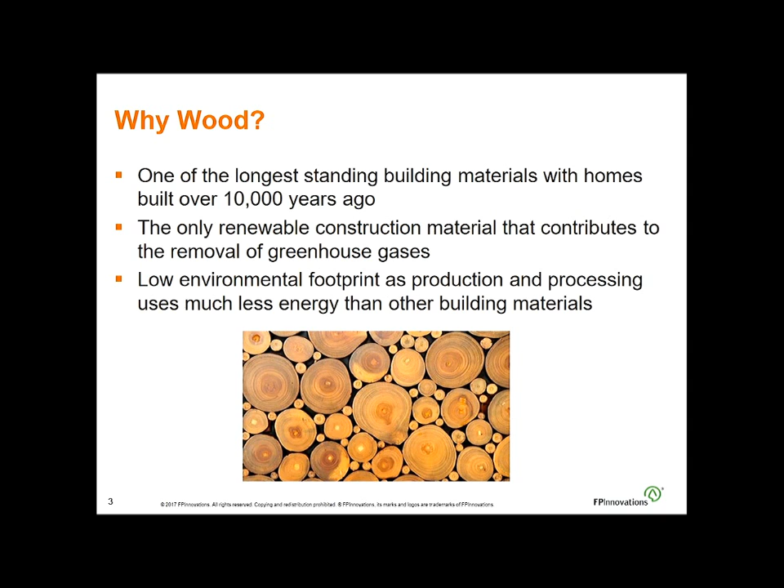So first of all, why do we use wood in buildings? Wood is one of the longest standing building materials, with homes built over 10,000 years ago. It is the only renewable construction material that really contributes to the removal of greenhouse gases, and it has a low environmental footprint because it requires less energy to be processed and produced, much less than other building materials such as steel or concrete.

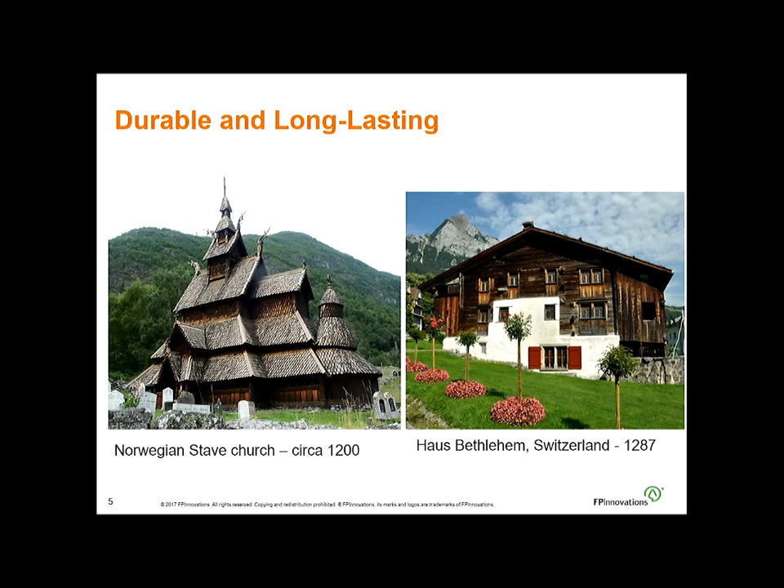Wood can be durable and long-lasting. Examples of that are everywhere. On the left, you can see Norwegian stave churches, which have been around for more than 800 years, or the Haus Bethlehem in Switzerland, which is probably the same age. These are among the oldest wood buildings in Europe, and they've withstood the weather and everything thrown at them. So the problem is that wood can be durable, but the problem we have today is that designs are not adequate to make the wood stay as it is and be durable.

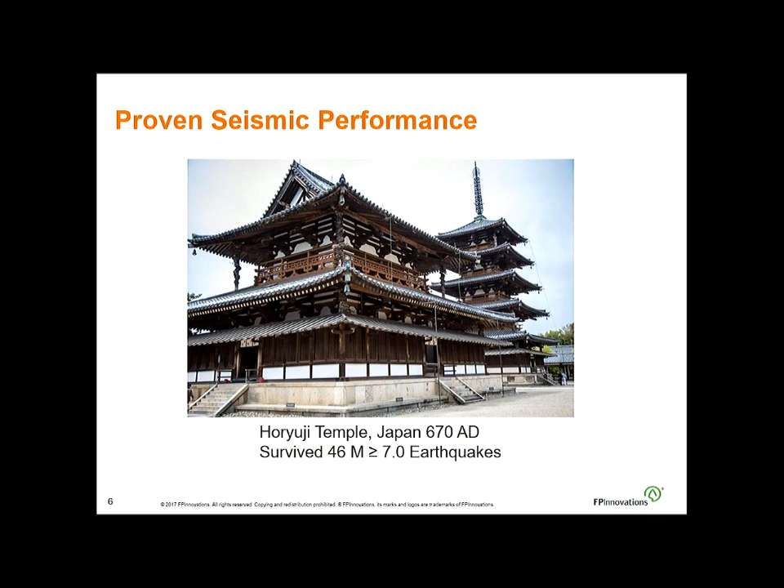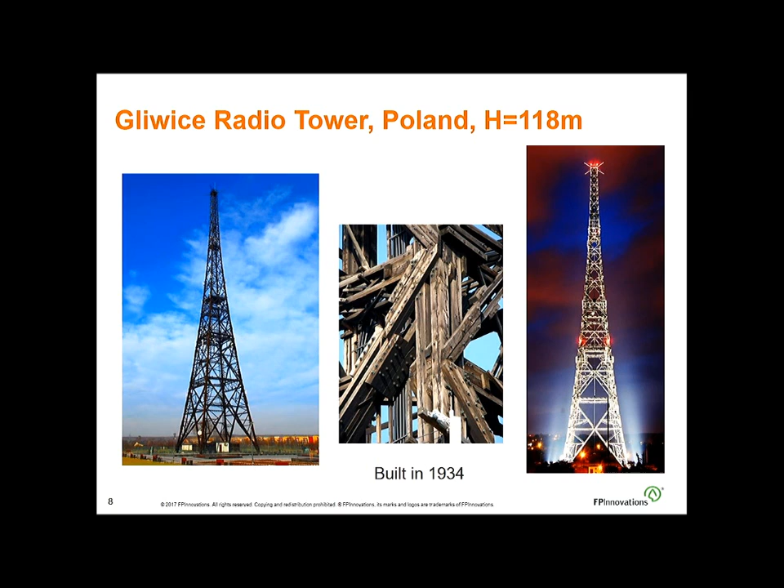But as I'll show later, the times came when we basically went quite in the other direction.

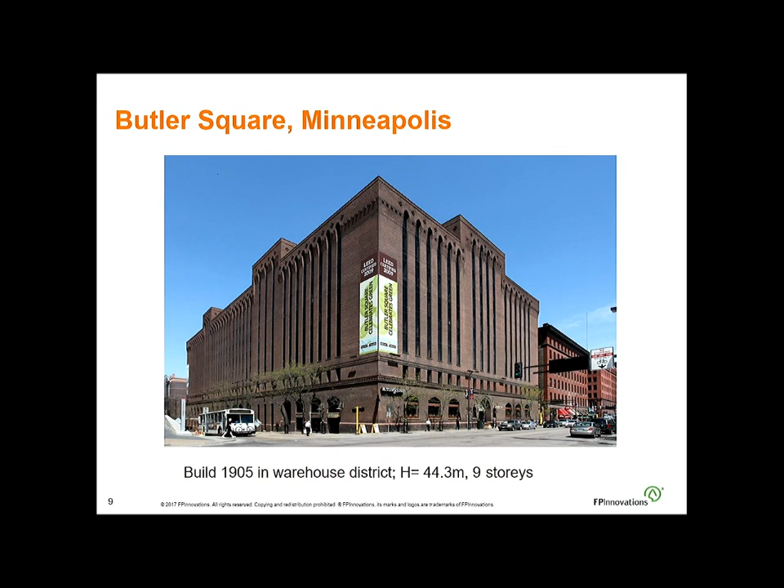Wood buildings can be also large. This is a wood building, one block in one dimension, almost two blocks in the longitudinal direction. It's a bit ugly on the outside, and you'll say, oh, this is not a wood building, but actually it is, 44 meters high, 9 stories. It's the Butler Square building in Minneapolis. But when you go inside, you see the real beauty, a beautiful open space, heavy timber building with a combination of offices, restaurants, and gathering spaces. It's a beautiful space to be in, really enjoyed by a number of professionals who have their offices there.

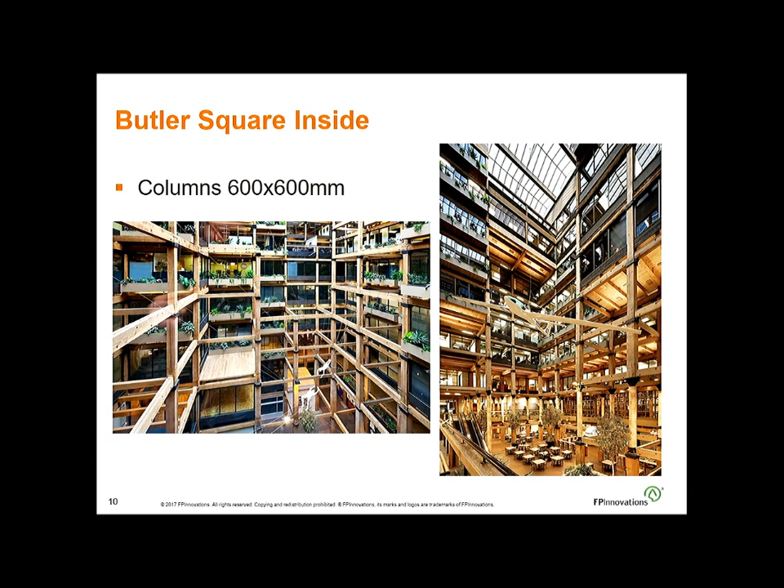And just to show you that buildings like this, as big, have been built 100 years ago.

Speaking about tall buildings, which will be one of the main topics of my talk, wood was not doing that bad in history. For example, in the US, at the turn of the 20th century, we had that 9-story timber building in Minneapolis, 44 meters high. The biggest concrete skyscraper was the one in Cincinnati, with 64 meters. And the Chicago Home Insurance building, a 12-story steel building, with a height of 42 meters. So wood was not doing that bad at the time. Actually, we were right there somewhere.

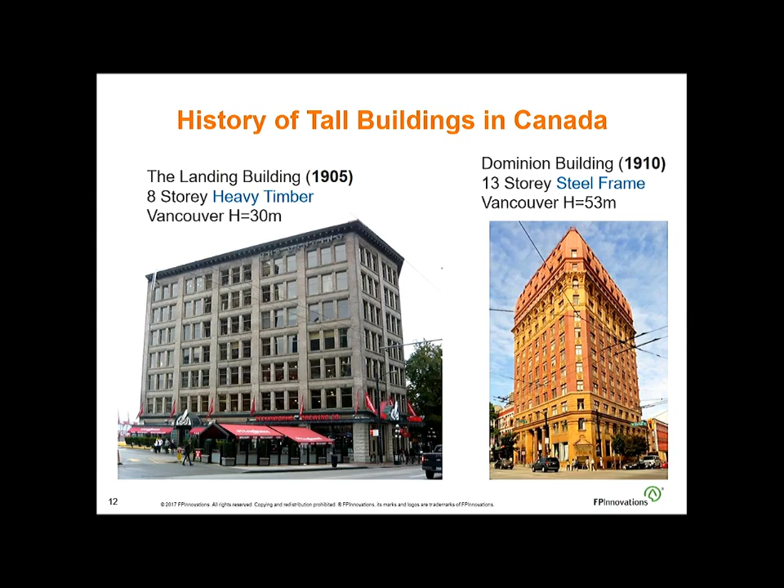Well, then the Dark Ages came, at least Dark Ages for wood. This rich history of wood use in tall buildings was halted during the second decade of the 20th century, and there were many reasons for that: fire performance concerns, frequent fires in major cities, although many people say now they were suspicious — of course, we have no evidence; wide availability of structural steel as a material; rapid development of reinforced concrete technology at the turn of the century; and last, the rise of architectural modernism that didn't include wood. So we blame the architects a little bit for this.

So because of all of this, suddenly from having timber buildings 40 and 50 meters high, we went down in just a number of years, restricted to low-rise construction up to 4 stories, and this lasted for almost a century, almost until the early 1990s.

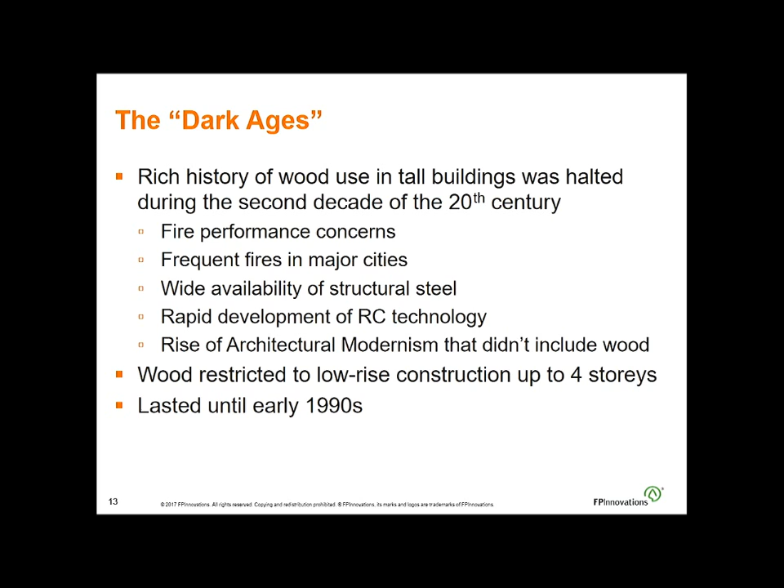Then in the mid to late 1990s, there's a renewed interest in wood, for several reasons. First, changes in the building codes — as most of you are engineers here, you probably know the codes changed from prescriptive design to objective-based design, which helped wood a lot. Then we had government support and legislation to promote wood use in buildings. Of course, there was development of mass timber products such as parallel strand lumber, laminated strand lumber, cross-laminated timber, and so forth; innovative manufacturing technologies such as CNC numerically controlled machines, and development of innovative connections. Finally, society came to a stage where there was a search for greener construction materials.

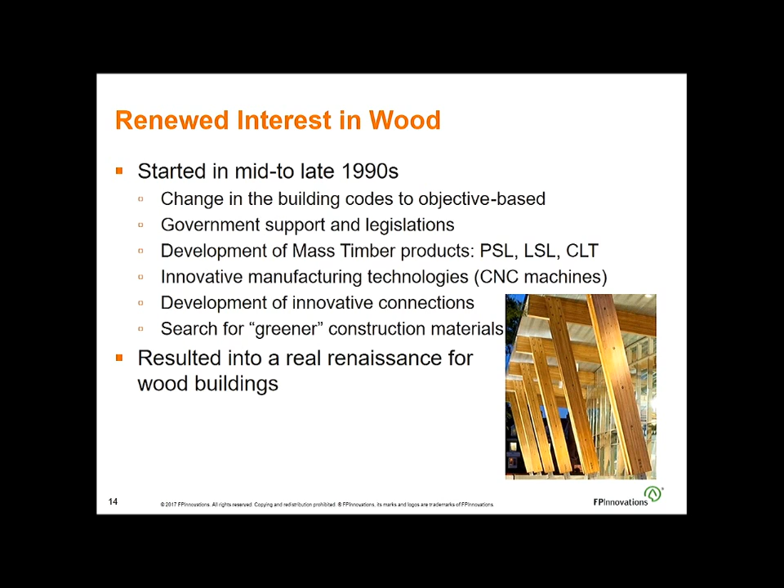So all of this together — like 100 years ago there were lots of reasons that went against wood — all of these reasons now suddenly went for wood. And that resulted in a real renaissance of wood building use that we are seeing today.

Cross-laminated timber was one of the main items that really got the spotlight back on mass timber buildings. For your information, in Canada there are 3 manufacturers: one in BC, one in Quebec, and one in Ontario. There's strong interest among designers and architects, strong support from federal and provincial governments, especially in British Columbia and Quebec, and considerable research and development activities going on to implement not just cross-laminated timber but also other products in buildings.

Then another buzzword came in 2011: tall wood. This was a report produced by Michael Green Architects and Equilibrium Consulting, an architectural and engineering firm from Vancouver. In 2011, they produced a report studying a system called FFTT, or Finding Forest Through the Trees, which is an unusual name. But what they proved as a concept is that wood can work in 20-story buildings, 30-story buildings, or even 40-story buildings.

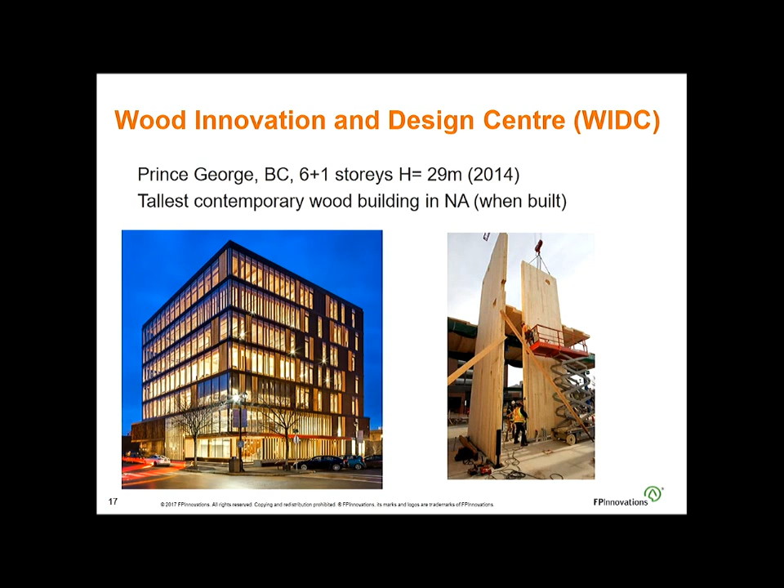So that's 2011, and since then we've seen a real explosion of what we call tall wood buildings — not tall in terms of steel and concrete, but tall in terms of wood, meaning 10, 12-ish stories and in that range. The first tall building in Canada was the Wood Innovation and Design Centre in Prince George in central British Columbia, a 29-meter building built in 2014. When built, it was the tallest contemporary wood building in North America, and from a structural perspective, it was the first building to use CLT in balloon-type construction.

Because cross-laminated timber was first produced and used in Europe, it was always used as a platform type of construction. So basically you have your wall, then you have your floor, and then the next wall and the next floor, and so forth. You develop a platform on which you build the next story.

This is the first building in Canada that used balloon technology for the walls, which means the walls go all the way from the bottom to the top of the building. The lateral system was taken by these elevator shafts and stairwells, balloon type walls, while the gravity system is all around by using glulam columns and beams.

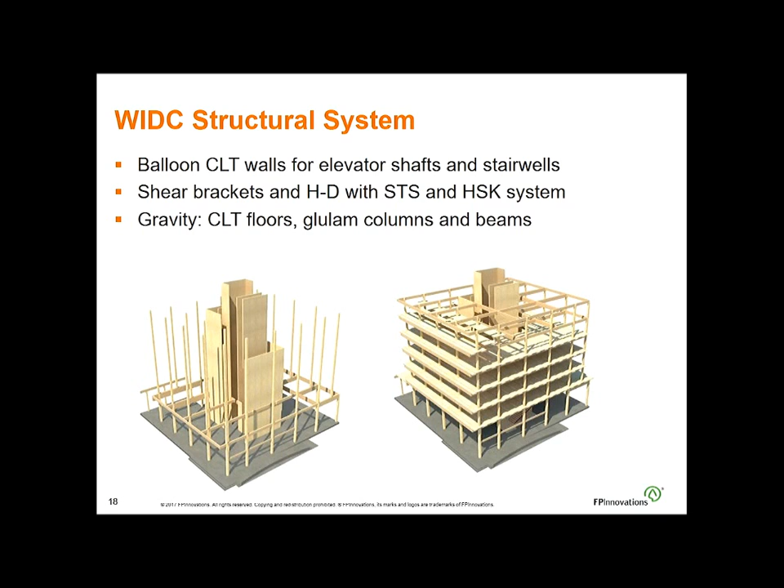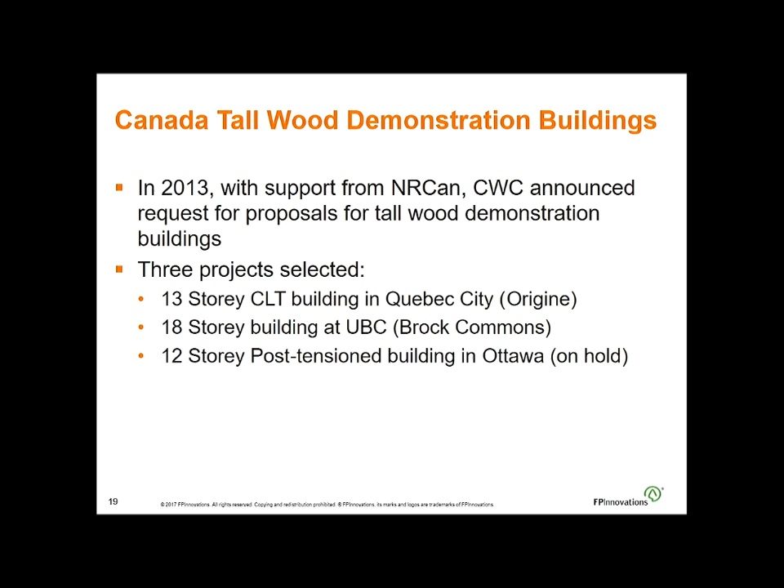So let's see about the Brock Commons building. It's basically a hybrid building, 53 meters high, 18 stories. The lateral system consists of 2 concrete cores, each housing the elevators and the stairwells. Those 2 cores are basically taking the lateral loads, the earthquake and wind loads. The gravity system is basically 2-way point-supported CLT floors, and loads are transferred directly to glulam and PSL columns.

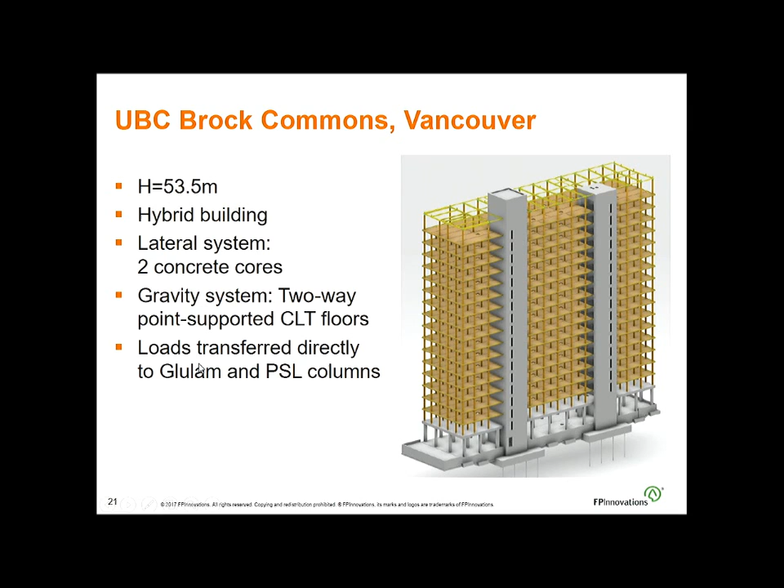So what was innovative about this building was the floor system. If you transfer the load from the floor above through the column, the floor sees that load and you basically have huge compression perpendicular to grain forces on the floor. To avoid that, the designers came up with an innovative solution that transfers the load from the column above to the column underneath directly through a steel tube.

So this is a cross-section of that steel tube. You can see right away here the load from this column is transferred through the steel tube to the column underneath. So the floors were basically independent, and the floor panels were just lying all around these columns. So basically, we have point-supported CLT floors.

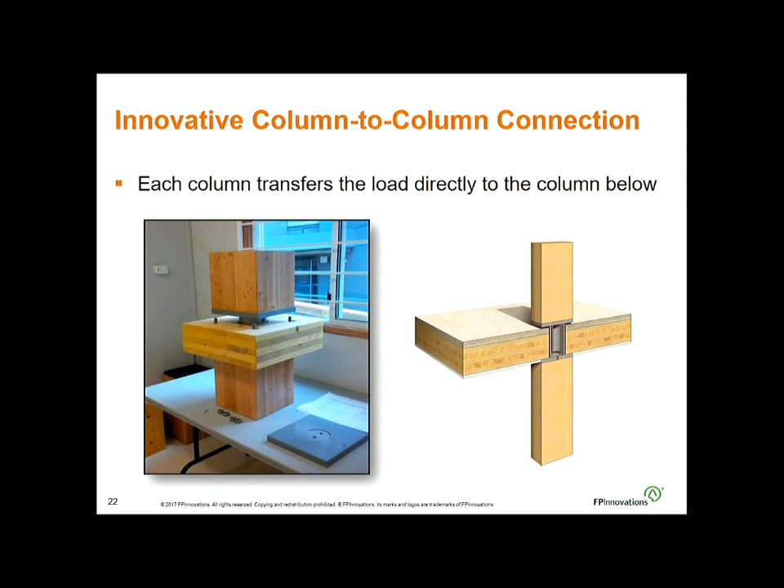In most cases, until this building, CLT was always supported on walls. So you have a long line of support where you put the CLT panels, and they mostly work in one direction, like one directional reinforced concrete slabs. In this case, the CLT floors worked in two directions.

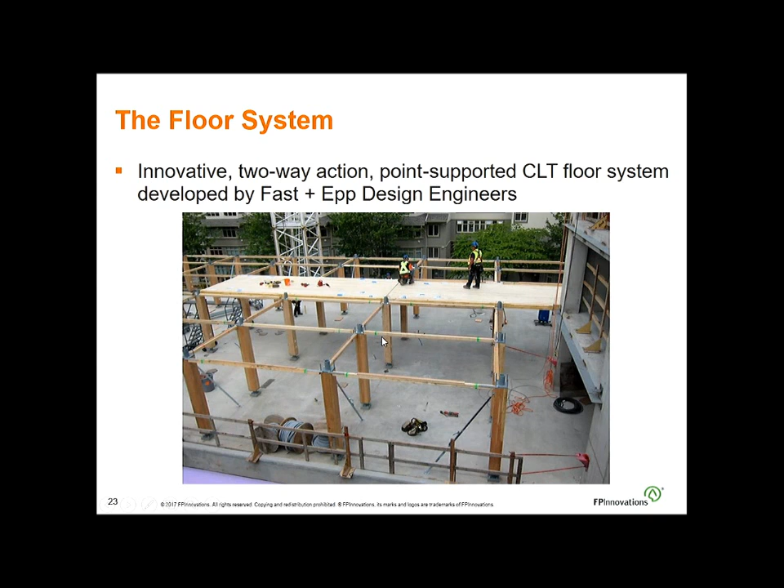So you see here how the floor panels are installed on top of the columns. Each floor panel spanned 2 bays - this is 1 bay, 2 bay, so this is one panel, and this is the next panel. Each panel basically was supported on 6 columns, which means, because there is no continual support at the edges of the panels in either direction, the CLT floor panels have to work in 2 directions.

To be honest, I was really surprised by the results that we got. Before the tests, I would have said that the strength of the floor without that big meter-by-meter hole versus with the hole would be significantly different. But in the end, the strength came within 5%, which means the CLT, through that interlocking mechanism, found a way to transfer the load around the holes. I was, to be honest, very surprised by that.

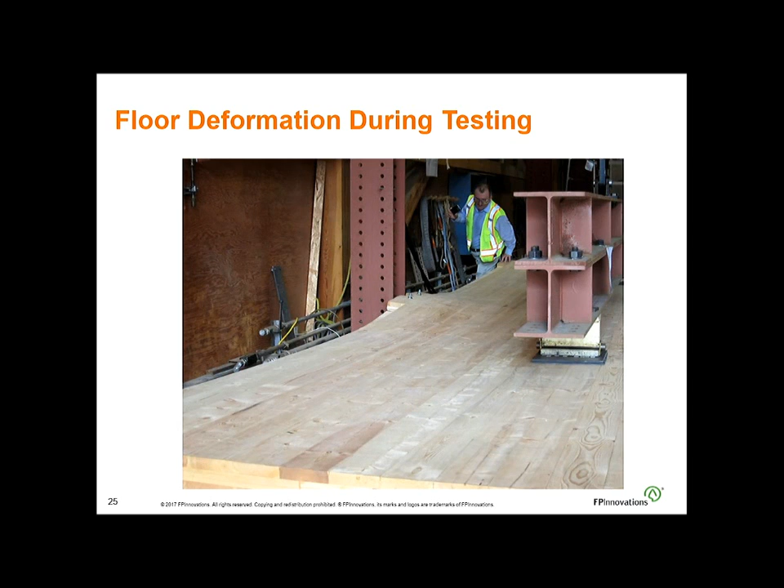This is the failure mode that we obtained. It's a combination of rolling shear and tension perpendicular to grain at middle supports. Of course, the bending moment in the middle is the highest, so you have failure at this point.

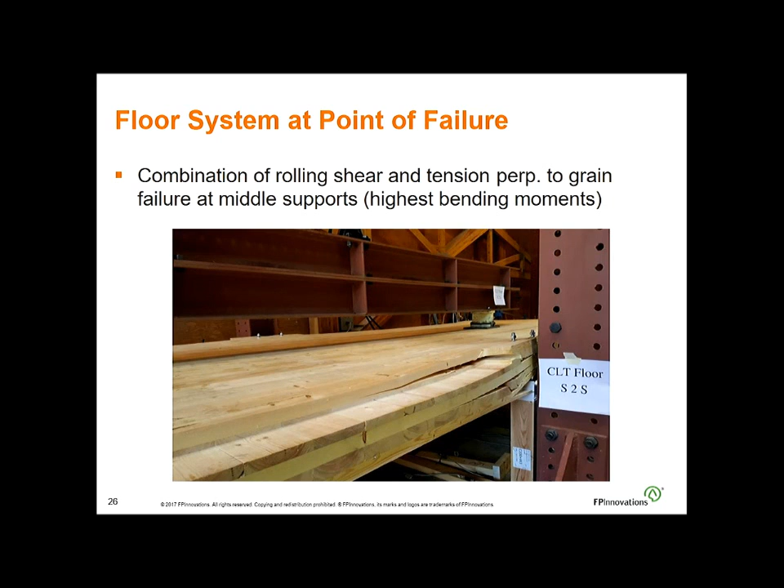What was also interesting here is when we unloaded the floor, it bounced back up right away. It was another interesting finding that we've never seen in CLT so far. Engineers were also very happy, it proved their design, so they were eager and implemented the design in the building.

Since it is the highest wood building in the world, we had to think about the fire protection strategy. For this building, we had a 3-fold fire protection strategy. First was not significant exposure of wood, meaning most of the wood was covered with 1 or 2 layers of gypsum, depending on where the wood was used.

The building was fully sprinklered, and we also had 30 minutes on-site backup water supply, a 20,000 liter water tank that was always available in case there was no water. So those are the 3 lines of defense in terms of fire.

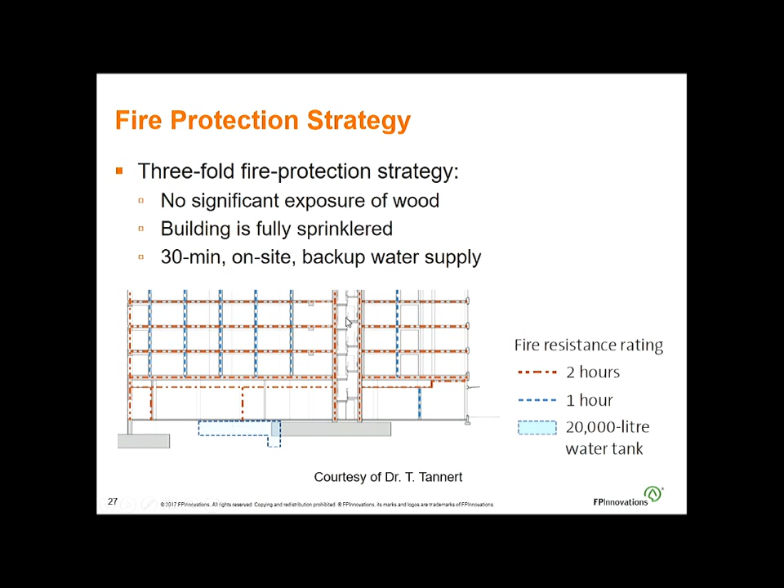One of the reasons they wanted to cover the wood with gypsum was also abuse, so it was not all fire-related concerns. They also had other concerns because these would be first-year students, and you know first-year students, at least in Canada, they graduate from drinking - say, one of the items on their list. Anyway, long story short, it's a beautiful view.

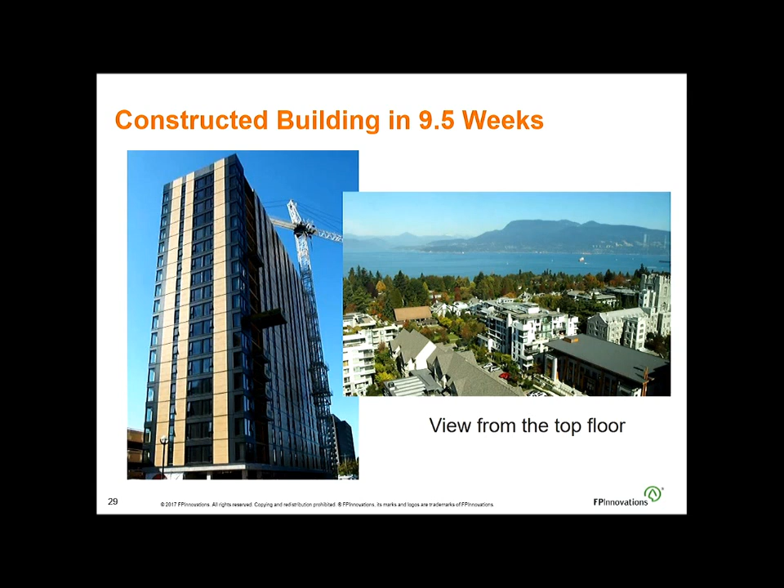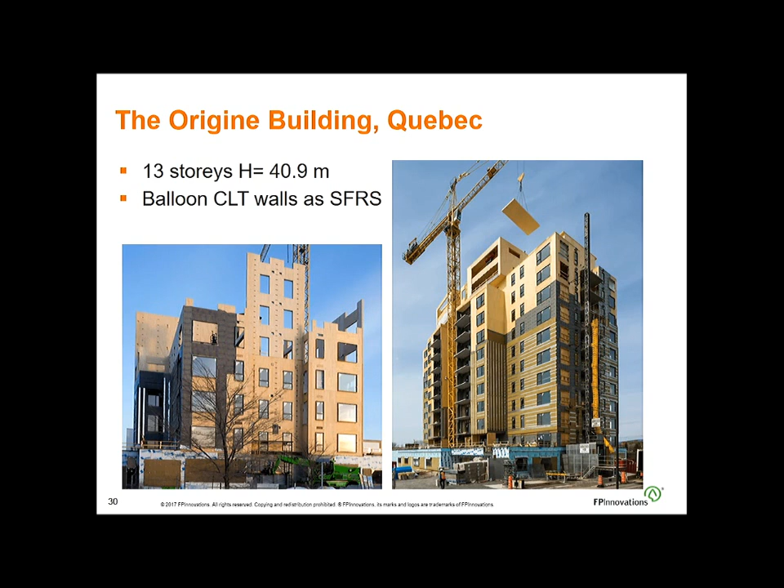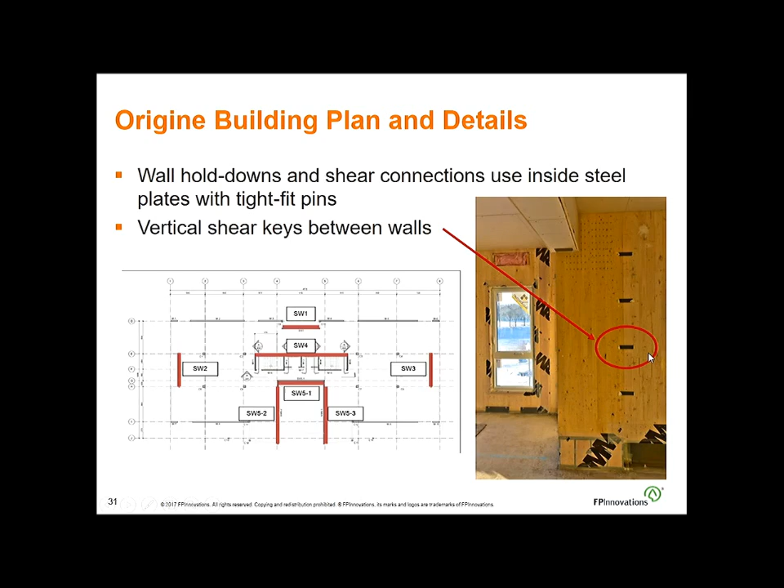The next project, again in Montreal, Quebec, was the Arbora building complex, which is still the largest mass timber residential complex in North America. It consists of 3 8-story buildings with a total of 434 residential units. Again, this complex used balloon walls for lateral loads and CLT floors for gravity loads, and of course columns to transfer the gravity loads.

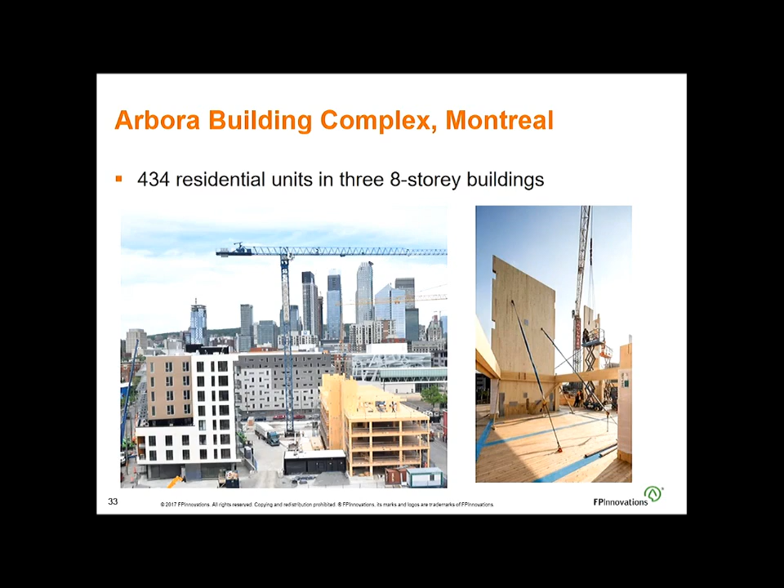So to help this movement into tall wood buildings, FPInnovations has been a leader, working with universities in Canada. We developed a technical guide for design and construction of tall wood buildings in 2014. We also developed a guide for the province of Quebec for mass timber construction up to 12 stories.

Actually based on that - because in Canada, the building code is on the national level, the national building code is the model code that covers construction for the entire country, but the provinces are those where the governing legislation comes from. So basically the provinces adopt the Canadian model code, but they can also change it.

So the province of Quebec, for example, decided based on the report that we prepared for them, that they could lift the limitation for stories up to 12. So right now in Quebec you can build up to 12 stories, while in other parts of Canada you have to provide an alternative solution.

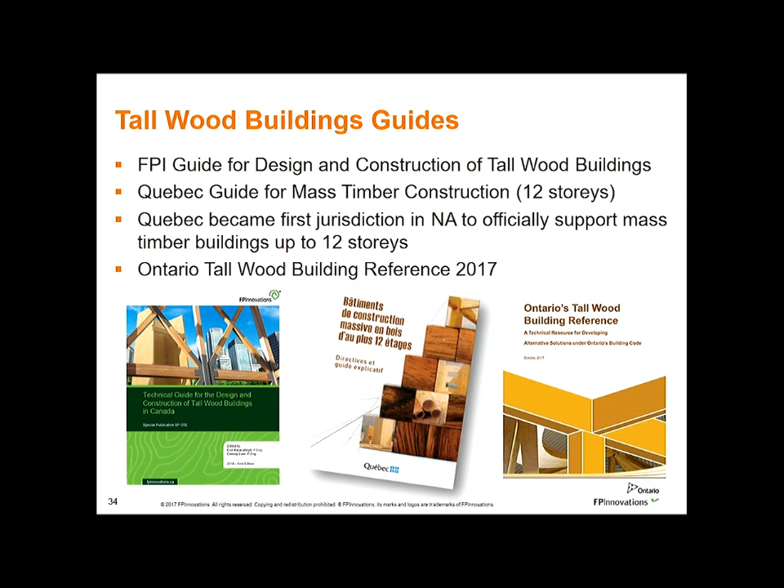Ontario, the province of Ontario, is to follow suit. So just a few months ago, they developed the Ontario Tall Wood Building Reference. This is all to help designers, giving them valuable information on how to design, how to analyze these buildings, and how to approach the entire problem.

Significant amount of research went into mass timber construction in Canada, regarding structural performance, connection performance, seismic performance, fire, durability, serviceability, acoustic environment, and even health effects of wood in buildings. So FPInnovations was fully involved, and we provide a holistic approach to our research. Basically what you see there, we were part of everything.

This is how we see how things should be done, because I'm a structural engineer myself, so I always lean towards structural areas. We can come up with a very good structural solution, but if that solution is not good for fire, we haven't done anything. Or it's not good for acoustics, or not good for something else. So really that holistic approach of teams working together to develop new solutions, that really paid well, and I think we are on the right path as an organization as well.

And basically, many universities started following this path as well, at least in Canada.

Since we are here in New Zealand, in the earthquake country, not many people know that Canada also has high seismic zones. They're mostly located in the western part of the country, in the north, and also in the eastern part of the country, in Quebec especially. The city with the highest design acceleration is Victoria.

Victoria has about 400,000 people, with a design acceleration of 1.3 G, so it's quite high. Vancouver, which is 2.5 million people, has a design acceleration of 0.86 G. These are kind of the high seismic zones. Then Montreal and Quebec City are in moderate seismic zones, 0.6 and close to 0.5 G respectively.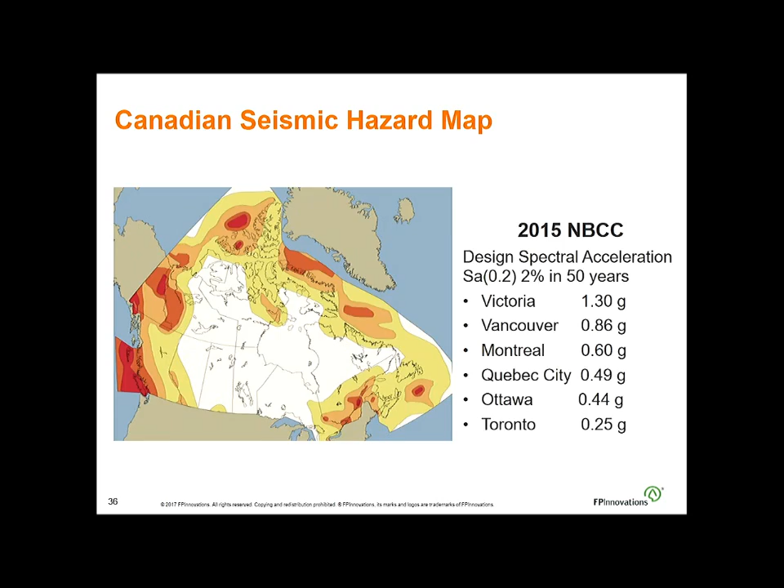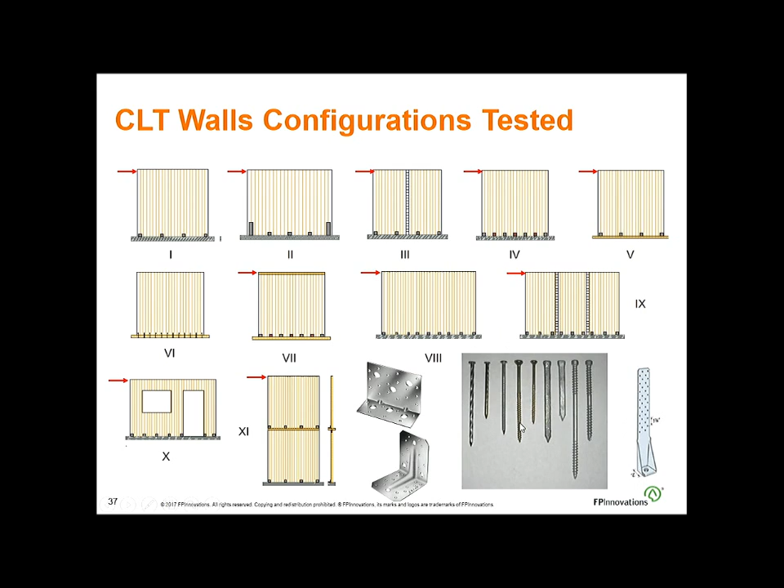Speaking of seismic, we did lots of testing on cross-laminated timber and other mass timber walls to find out how they perform, and what are the main parameters that influence the seismic performance of cross-laminated timber walls. We tested walls with different configurations, aspect ratios, different heights, with openings, without openings, with various types of fasteners and so forth.

We found out what we needed basically—that some fasteners perform poorly, and by looking at this hysteresis loop, you can definitely tell that these screws used at 45 degrees to connect the wall to the CLT underneath are not performing well during an earthquake. While if you use regular nails or similar screws, they can perform very well, and you can get very developed hysteresis loops, with lots of energy dissipation in the system.

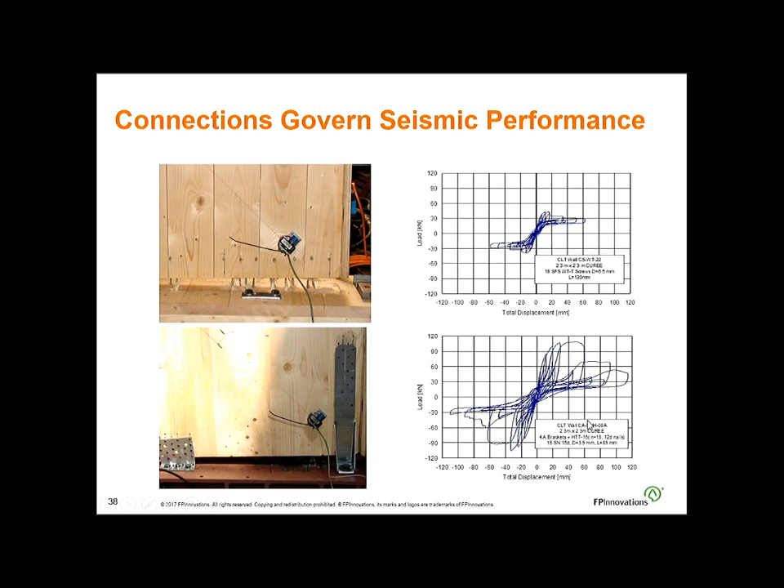In mass timber, everything happens in the connections. So you have to find a good connection to have a good system performance.

Then we moved into three-dimensional experimental testing. This is a two-story house that was tested at FP Innovations. We wanted to see the two-directional motion, because testing one wall is one thing, testing a three-dimensional thing is something else. We learned how perpendicular walls behave, how the stories are connected together, and whether they influence one another.

What we got here is that the response was a combination of rocking and sliding deformations. The walls with openings had higher in-plane deformations. Main deformations were in the joints between the panels, and on purpose we put joints between the panels so that when they rock, they dissipate energy.

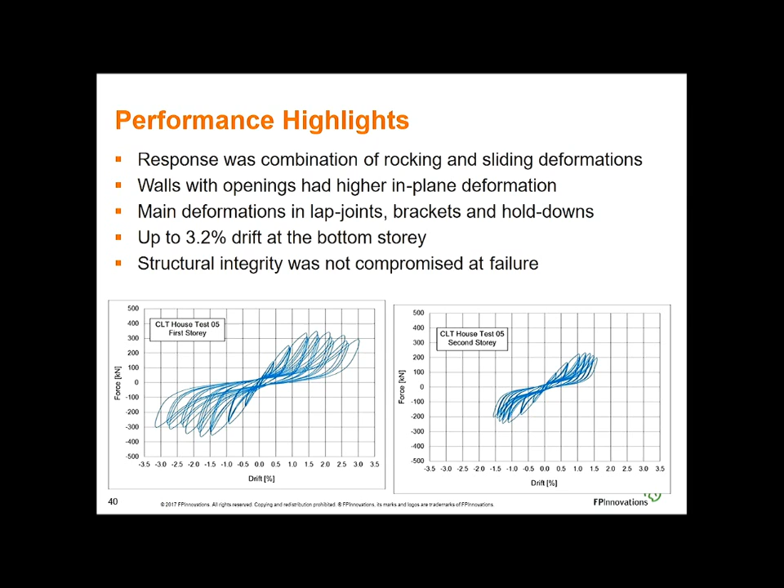What was interesting is that we achieved up to 3.2% of story drift at the bottom story. And most importantly, the structural integrity was not compromised even at failure, which we called failure at 3.5%, or 3.2% story drift.

So again, just a few pieces of information. Here is basically determining the types of deformation that a CLT or mass timber building will have. You have global rotation of the building, you have rocking of every panel, then you have sliding, and then you have in-plane shear and bending deformation, and so forth.

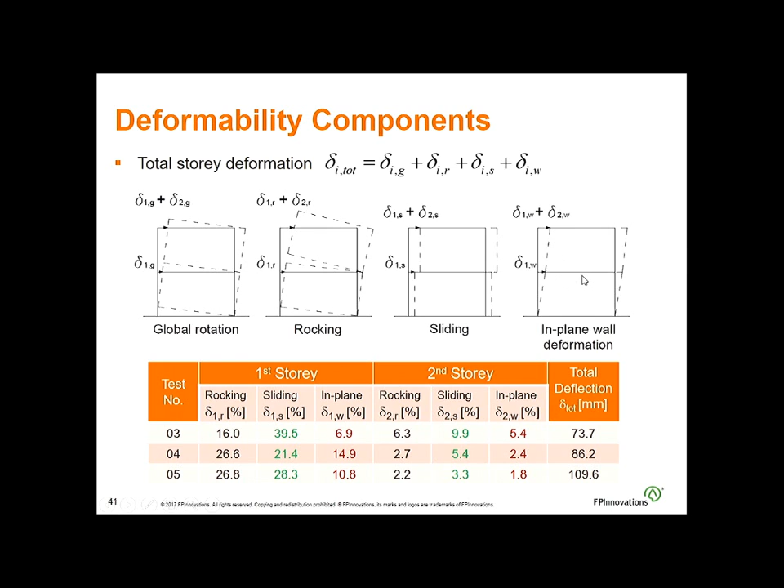Then we went further and said, okay, we now have component tests, we have data. Let's now determine the R factors, or what's called K mu factors in New Zealand. Those are the factors used in seismic design to reduce the elastic base shear. So you have the elastic base shear and it's divided by these factors.

So basically you design the building for a reduced shear because of the ductility of the building. For those ductility factors, we used a building that we were also part of that project. This was in 2009, a 6-story stick frame building tested at the largest shake table in the world in Miki, Japan, just outside Kobe. This test basically examined going from 4-story stick frame to 6-story stick frame, and was the pinnacle of that research. It was led by Colorado State University.

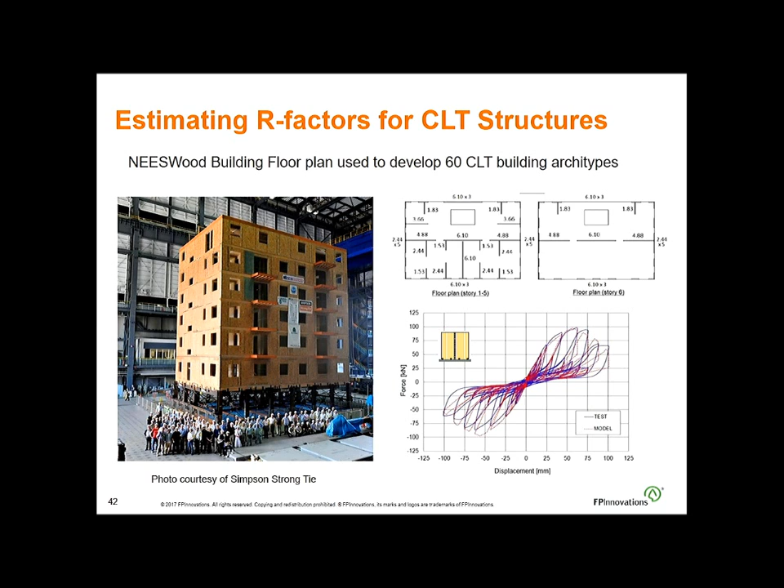But we used the same building, and we redesigned it analytically and numerically as a CLT building. We used the same floor plan, but instead of 2x4 walls, we used CLT walls, based on component tests that we have. And then we developed analytical and numerical models for 6-story, 10-story, and 15-story buildings, and so forth. It's a long analytical process. A total of 60 different buildings were analyzed using the Sapwood program.

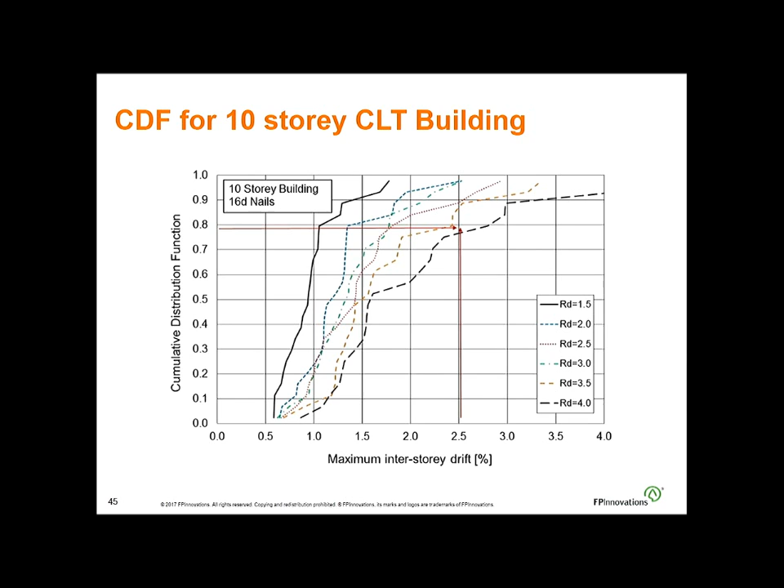Same fragility curves, now for a 10-story building. As you can see, as the building goes higher, the probability of failure actually goes lower.

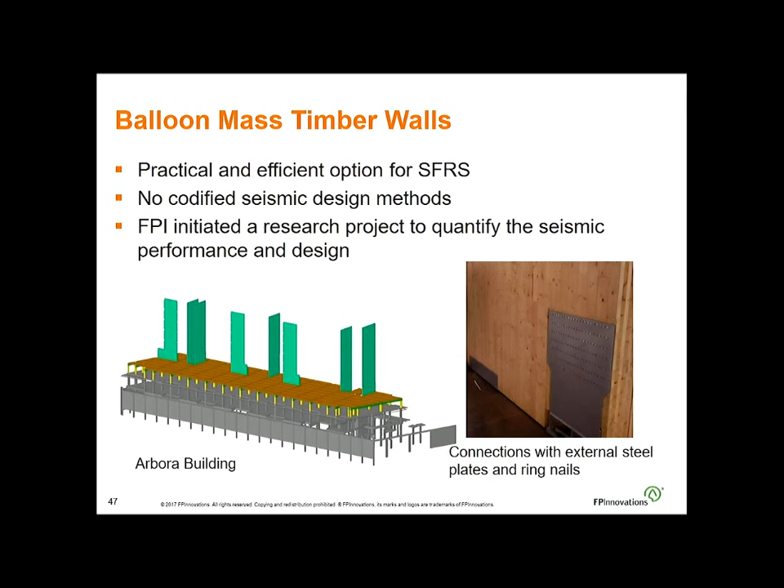So coming back to balloon mass timber walls — they're a very practical and efficient option for seismic force resisting systems, but there are no codified design methods anywhere in the world. So we initiated a research project to quantify the seismic performance and design of these walls. Of course, they've been used in the buildings I've shown you in Canada, so engineers and designers are really craving for information. We developed a testing program to help them.

We tested different types of walls. Here on the left you can see a balloon wall with just hold-downs at both ends, which basically take the uplift loads. Then there's a wall that was cut in half and connected with connectors between the two halves. And also some coupled walls with stiff connectors along the height.

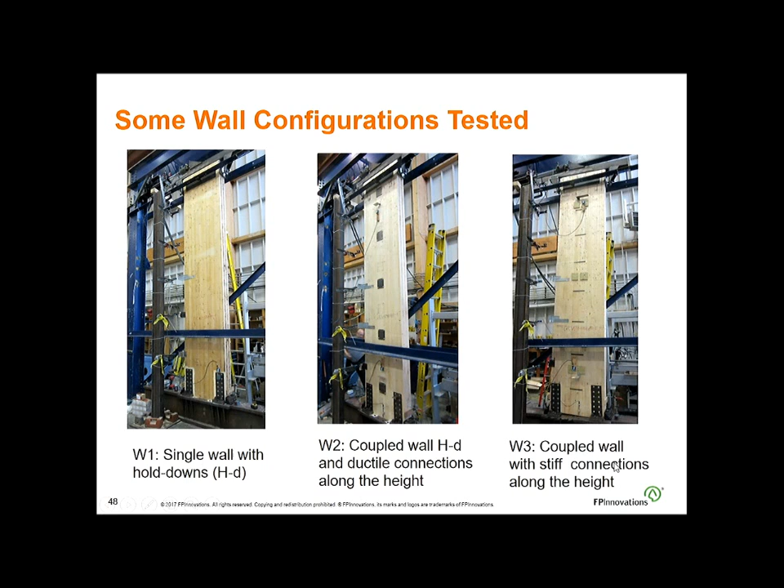Here are some close-ups, showing the hold-down at the bottom — a regular hold-down with steel plates and screws, nothing fancy. This is one wall configuration. This is the second configuration, where the wall is split in two and connected with regular screws and steel plates in the middle.

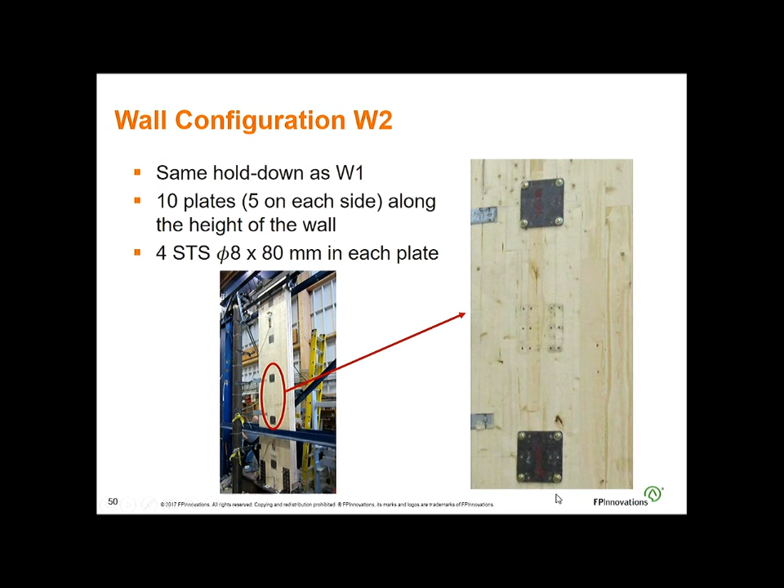The third configuration: again you have two walls split in the middle, but joined by thick steel plates. One of the problems in balloon construction is you have to go all the way up with your wall — that's 13 stories in this case, in Quebec. But CLT panels come 3 meters wide from production; you can't have a wider panel for now. So 3 meters by 40 meters is a huge aspect ratio, meaning you need wider walls, which requires connecting 2 or 3 CLT walls together, finding a system that joins 3 separate walls into one performance-wise.

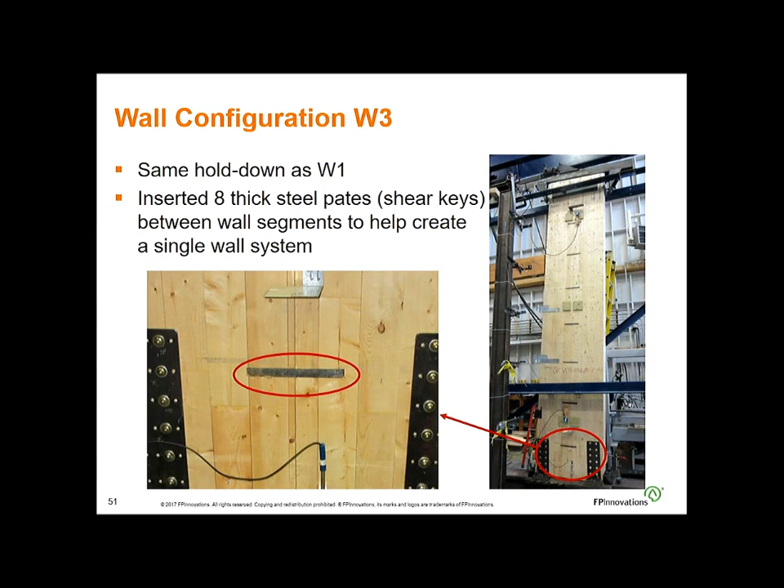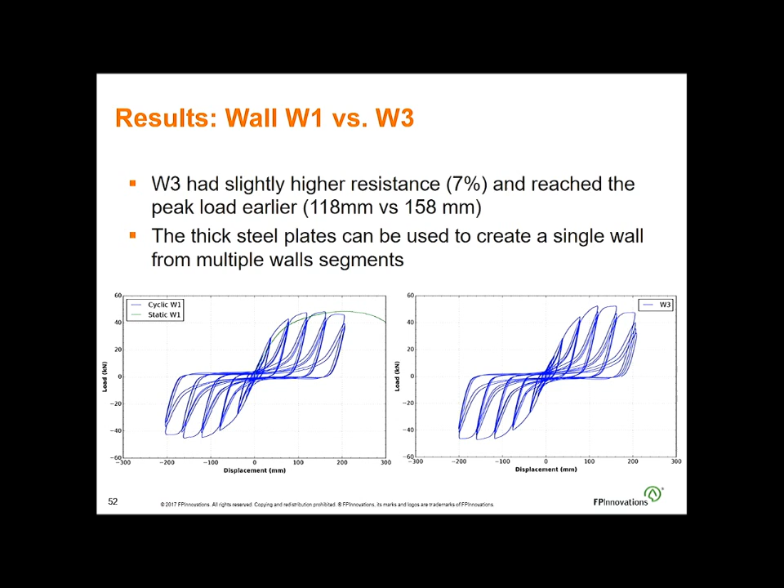This was one idea we came up with, and it worked well. Here are some load-displacement curve results from the walls with hold-downs only, and here is the wall with hold-downs plus inserted thick steel plates — the behavior was almost similar. So we achieved what we wanted: from one wall to two walls connected with something, we got similar performance. The wall that was cut in the middle and connected with screws, as expected, had lower stiffness but also higher deformability than the wall that wasn't cut in half.

Then that building that I showed you in the Tallwood report, FFTT, we also had a research project to help that one become from a concept to a more usable solution.

The basic concept is that you have these balloon walls in the core of the building, all wood core, mass timber core. You also have steel beams in both directions inserted in the wood core. Whenever the building responds in any direction during an earthquake, plastic hinges develop in the area of contact between the steel and wood core. So basically it's a steel failure mechanism of a weak beam, but you're also developing crushing above and below in the core. So you have to design for both.

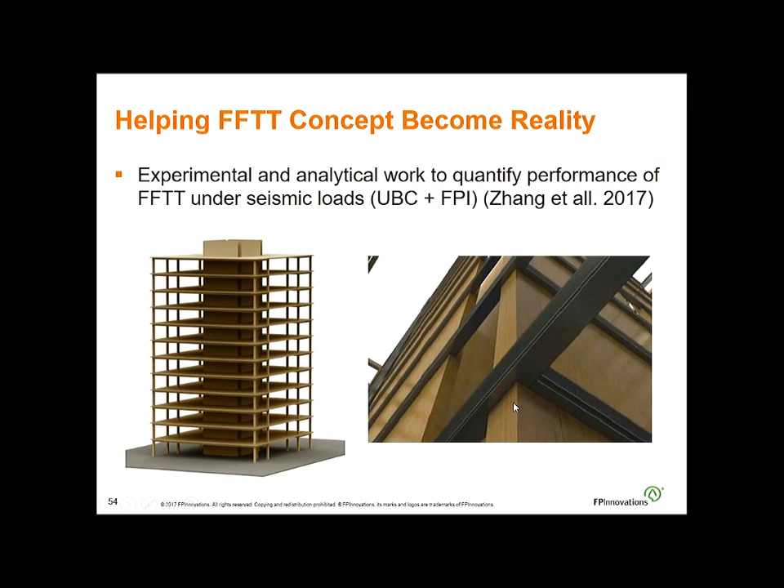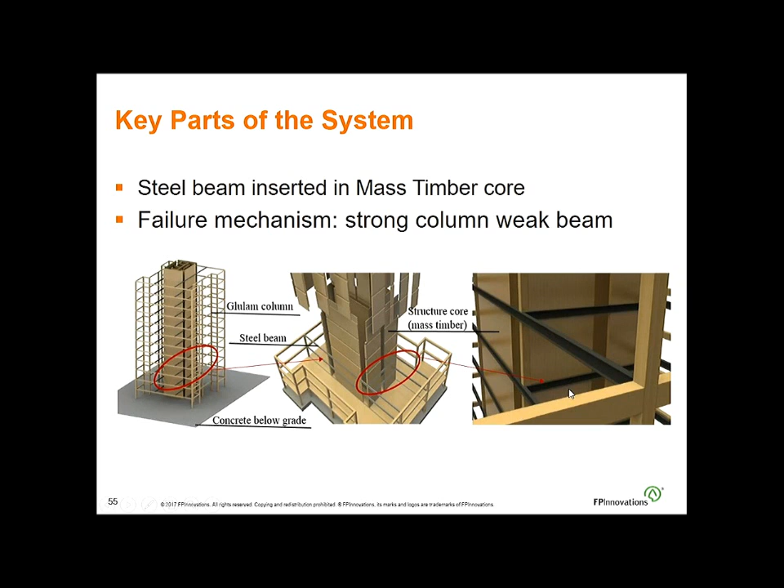This is again the system. The core, and around the core is the gravity load system. Again, the steel beams with the core CLT or any mass timber element. So the design was strong column, weak beam.

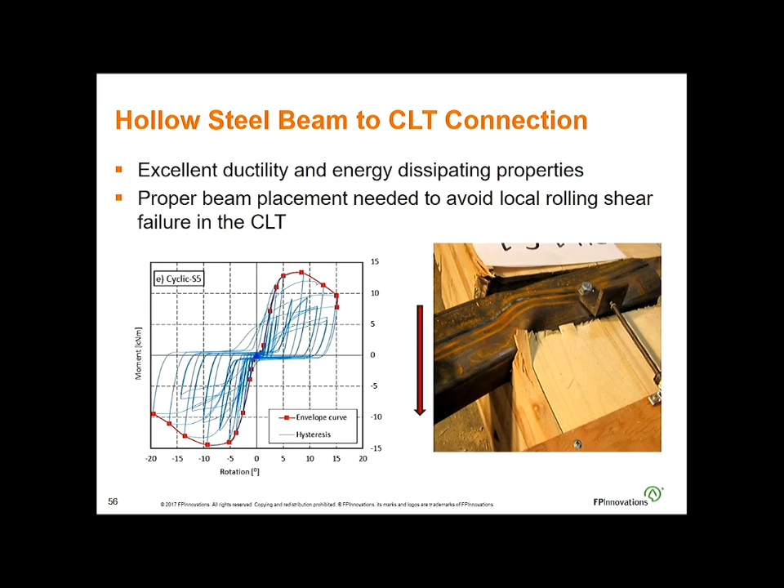We tested quite extensively, a collaboration with UBC, University of British Columbia, next door to us. We found excellent dissipating properties, but also developed procedures for how much you have to insert the steel into the mass timber panel, to avoid rolling shear failure in the panels.

And then almost a 4-year PhD here with a huge amount of numerical analysis to determine the performance of this type of building and to determine the R factor, or in your case, KMU factor. We came up with a factor of 5, which is really high for Canadian codes, one of the highest actually. Steel moment frames and steel shear walls have an R factor of 5 in Canada.

Then a little bit more innovative. Those who are in steel know that there are different types of steel moment frames — highly ductile ones that are probably expensive, and frames with lower ductility that are cheaper solutions. So we said, what if we have a cheaper steel solution and then insert CLT panels in some of the bays of the steel frame, and connect it with connectors.

We did lots of study, another PhD thesis here with UBC, studying and optimizing this solution: how the gap should be, what the properties of each connector should be, where connections should be located. We discovered which bays should be paneled with CLT and which should not — there are lots of combinations to play with.

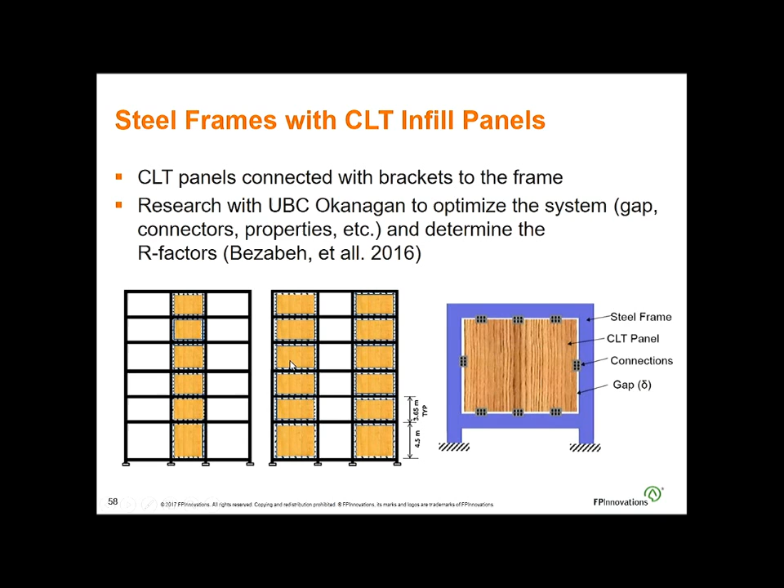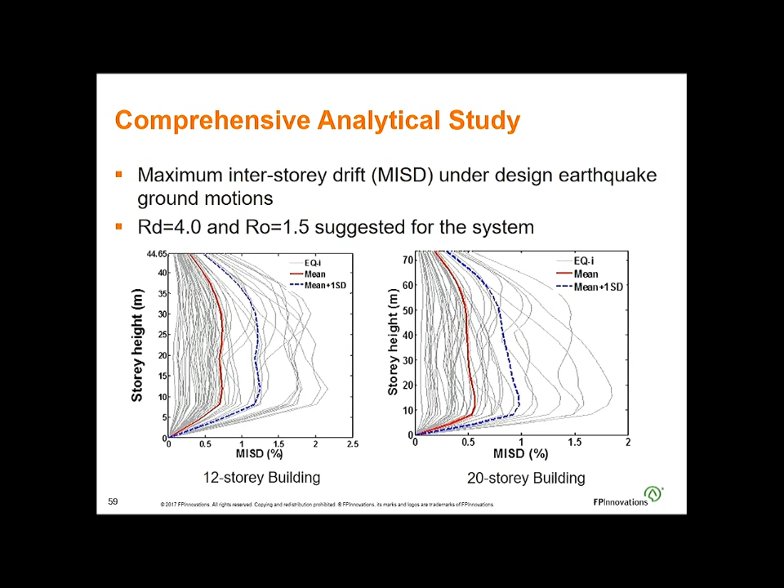Wind performance is another consideration. As you all know, tall mass timber buildings are much lighter than concrete or steel buildings, and they're more flexible by nature, so frequent exposure to wind-induced vibrations can cause occupant discomfort. In tall wood buildings, there's a certain height up to which seismic performance governs the design and response — depending on the system, that height could be 18, 20, or 25 stories. If you go higher, winds start to govern the response, so your headache will come from the wind side.

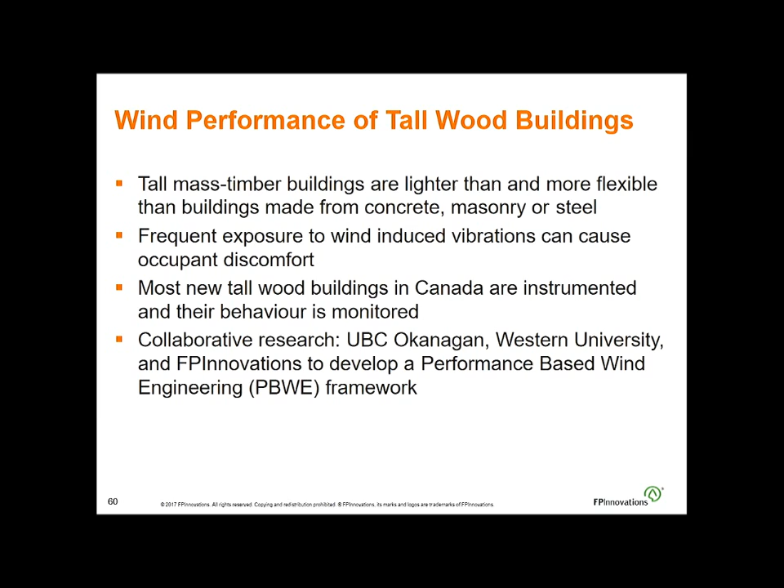To find out how tall wood buildings perform under wind loads, most new tall wood buildings built in Canada are instrumented, and we've followed it. We're finding lots of interesting results on how the buildings perform during windstorms. There's collaborative research on this topic between UBC Okanagan, Western University, and FP Innovations, and we're trying to develop a performance-based wind engineering framework, just like we have performance-based earthquake engineering.

One of the building concepts we studied in this case was the so-called SOM building concept. SOM stands for Skidmore, Owings and Merrill, a respected company from the US. They came up with this concept of up to a 40-story building that is a hybrid combination of mass timber and concrete.

We took that idea and said, okay, we're going to go with a 30-story building, story height of 3.4 meters, and lots of details. I have no time here to explain, but we designed the connections and everything according to the concept given to us.

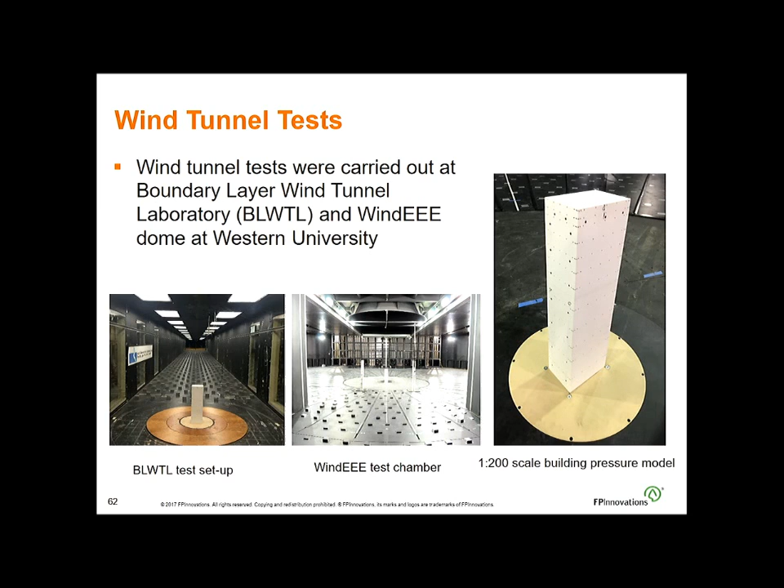We had a scaled model tested at the wind tunnel testing boundary layer facility in London, Ontario, and at the WindEEE Dome at Western University, one of the best facilities of its kind in the world. From this we learned a lot about how tall buildings perform and how pressure changes on a tall wood building. We want to develop performance criteria that will someday be codified for tall wood buildings. This is the first research of its type in the world.

Then finally to the next level, resilient buildings. You here in New Zealand know this well. Our friends in Christchurch found out the hard way that life safety alone is not a good enough criterion for designing buildings against earthquakes. Yes, it's good to have life safety, but then you end up with huge economic losses. So there's a real need for resilient, or low-damage structural systems, that reduce damage while offering the same or higher level of safety to occupants. Several types of systems have been developed.

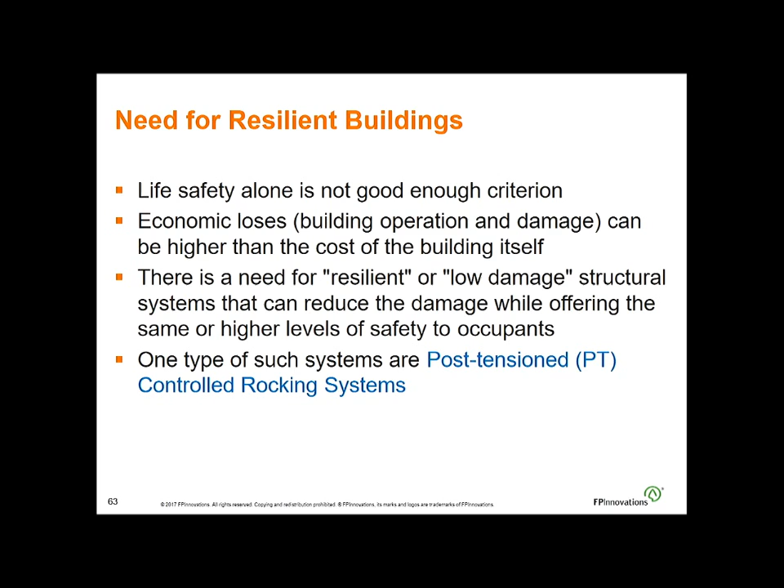One of them, in Auckland, developed by Professor Pierre Quenneville, uses slip friction joints, which I had a chance to understand and see this week. Here I'm going to talk about post-tensioned controlled rocking systems, developed originally at the University of Canterbury in Christchurch, and then developed into different mass timber wall and beam-column systems. FP Innovations has purchased the licensing rights for this system for Canada and the United States, and we are currently doing lots of research in this area.

Our colleagues from Christchurch have been testing this system for almost seven or eight years now and have lots of in-depth information, most of it on LVL. We wanted to see what the system performance would be with cross-laminated timber made of Canadian species and Canadian products. Because of the post-tensioning effect, material properties have a significant effect on system performance, so if something performed well with New Zealand LVL, it won't necessarily perform well with Canadian CLT.

You probably know the system well. You have post-tensioning cables, in this case in a wall system, in the middle of the walls, and those walls rock. The post-tensioning provides re-centering after the earthquake. Between the walls, or in other places, you provide UFPs, U-shaped flexural plates, or other energy dissipators to help with energy dissipation.

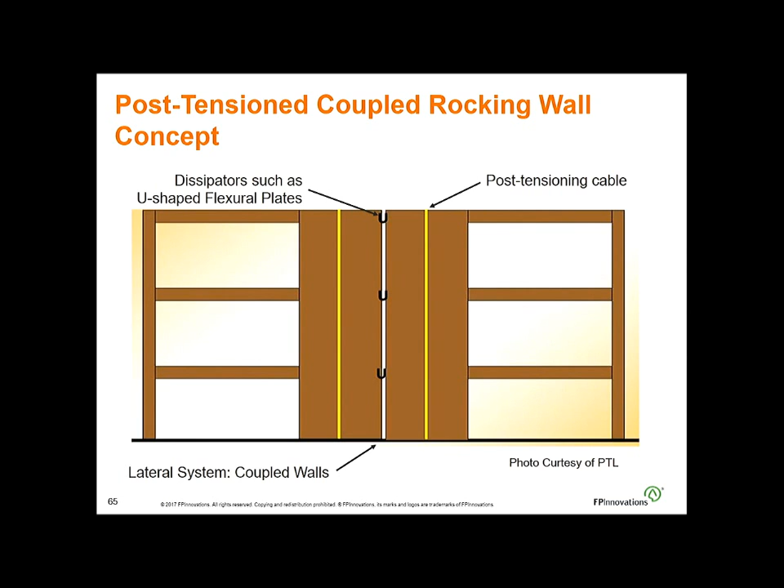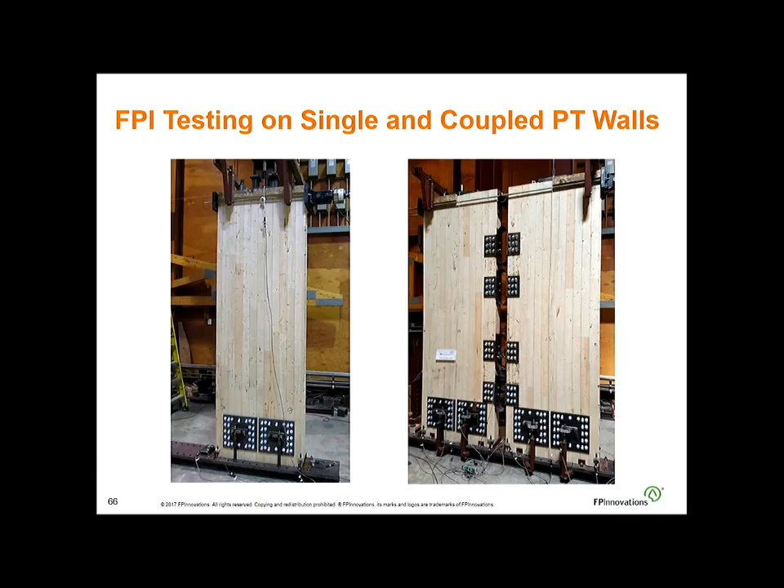Resiliency is really taking over most of the research in North America at this point. There's a huge push. We're part of a big project, mainly in the US, with a great number of universities, from Colorado School of Mines to Colorado State University, University of Washington, Washington State University, Lehigh, Nevada and so forth. We have FP Innovations and ourselves there, plus a few other design companies, working to develop a resilience-based seismic design methodology for tall wood buildings.

The pinnacle of this project involves componental tests going on right now at many of these universities, including ourselves. But the real pinnacle will be a shaking table test done at the University of California at San Diego shaking table, probably in 2019.

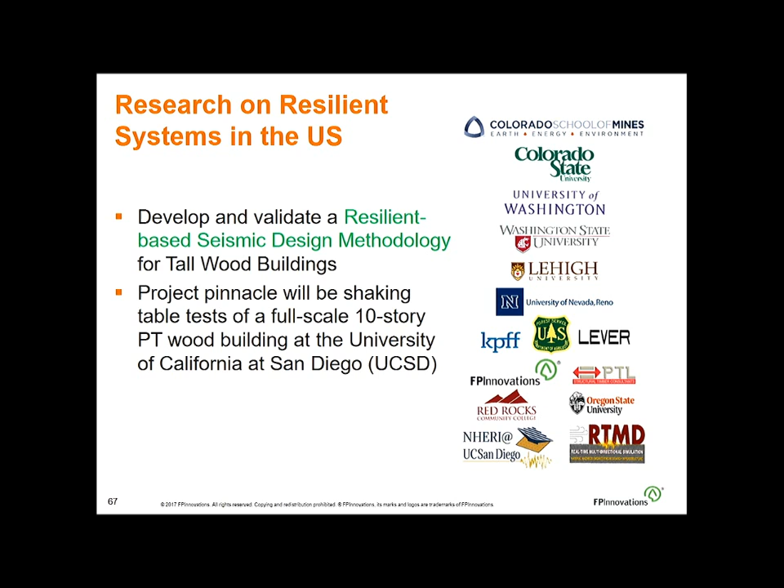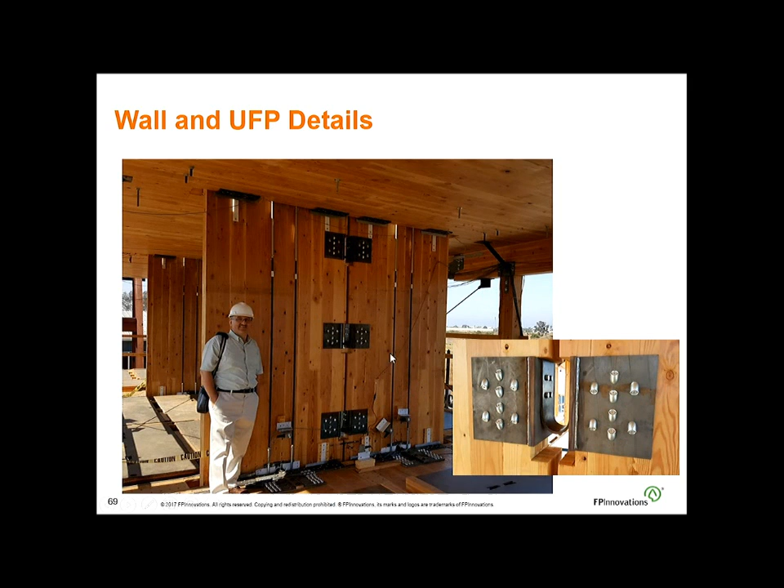Before doing a 10-story building, it was nice to see the performance of a building with just a couple of stories. A series of tests were conducted at the same shake table in San Diego on a two-story post-tensioned system. Here are the details: the walls go all the way to the second floor, with UFPs, U-shaped flexural plates, attached between the walls to help with energy dissipation when the walls rock, and post-tensioning cables on the outside, shown there just for simplicity. I can show you a video from the test.

So the findings after the test, and actually we did quite a high number of tests, was zero damage. The system performed really as designed. There was literally no damage.

We designed this system so that the walls can be taken out. Basically there's a hole in the diaphragm at both levels, so the wall can be taken out and replaced by another wall, just slot in another wall, and you can do another test. Take the walls out, put new ones in, do a testing. We were experimenting with different walls, different connections, and so forth to find out. Even some designers that came up with innovative walls also jumped in. They said, oh, can we test this? We put new walls? Yeah, please do.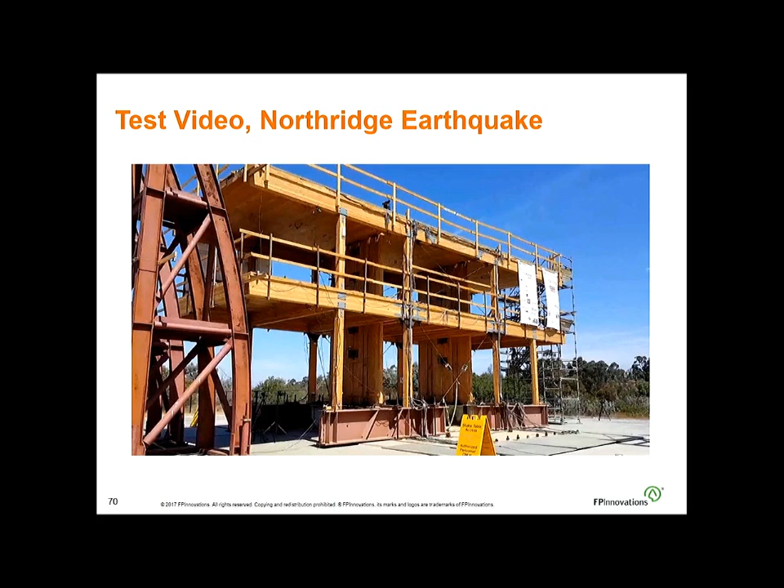So it is an interesting project. And again, as I said, we're expecting to have a 10-story building in more than a year from now.

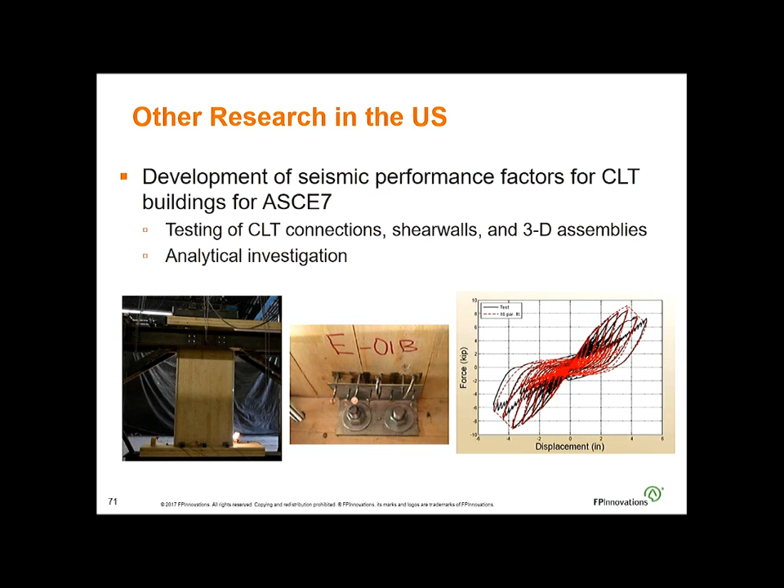Other projects in the US - there's a large project that I'm also part of. We're trying to develop the seismic performance factors, famous factors for CLT construction, to be implemented in the loading code in the US. So lots of tests on US CLT wall applications, connection tests, and so forth. We are at year 5 of this project, and hopefully we're going to finish this year, and then we're going to propose the system for acceptance in the US codes.

Speaking of post-tensioning and the Pres-Lam system, there are 2 buildings in the US that are underway. The first one is the forestry building at Oregon State University in Corvallis, Oregon, just an hour's drive south of Portland. It's a large educational building, 3 stories, post-tensioned walls, about 8,000 square meters. The main designers are Equilibrium Consulting from Vancouver, and they've come up with a really good system.

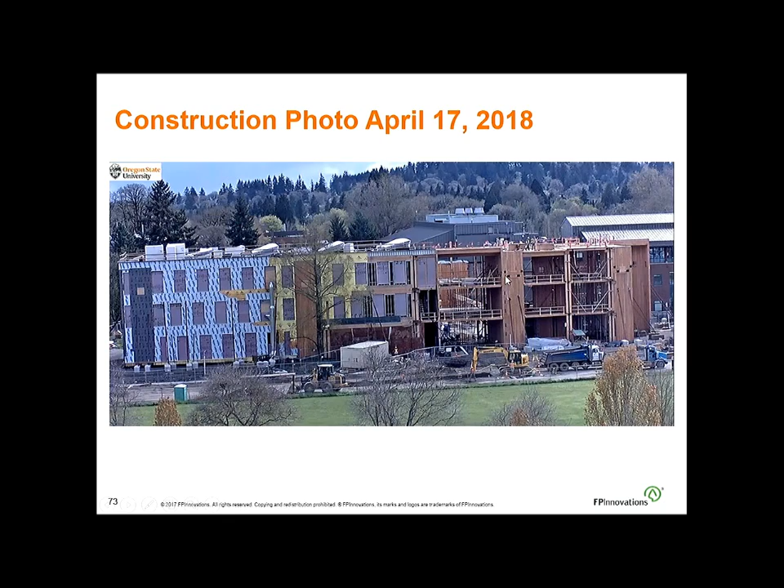Also some construction photos, again post-tensioned walls. In this case, they didn't leave enough space between the UFPs in the wall, so they cut both sides of the wall to make enough space for the UFPs to fit in. They also used another innovative solution - they put the UFPs in many places at the end of the wall. This is a steel member that goes alongside the wall, acting as a hold down at the end of the wall that goes all the way up, so you have a hold-down solution with a UFP on it.

So this system gives you different options. By having an experienced designer, you can come up with different solutions that are best fitted for the project.

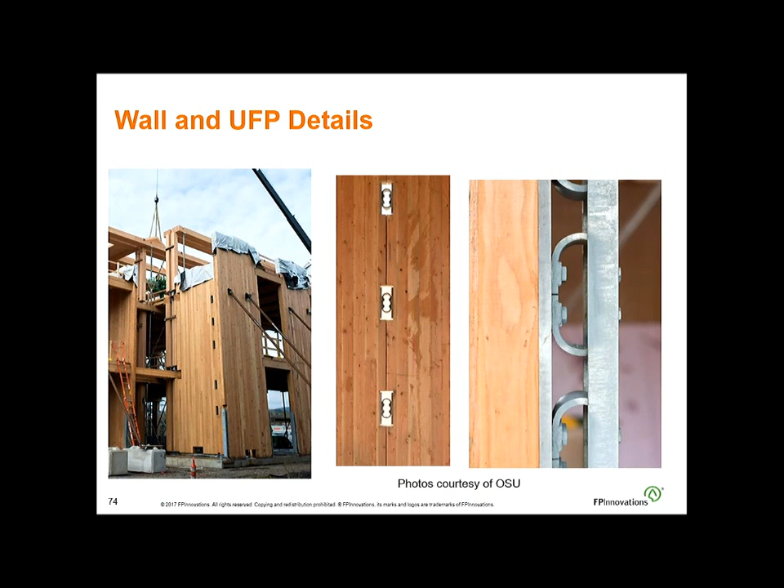The second building will be much higher. It's called the Framework Building. It will be in Portland, Oregon. 11-story, 43 meters high - this will be the tallest post-tensioned all-wood building, and actually the tallest all-wood building in the world when it's built, because the one in Vancouver that I showed you has concrete cores. This one uses all wood.

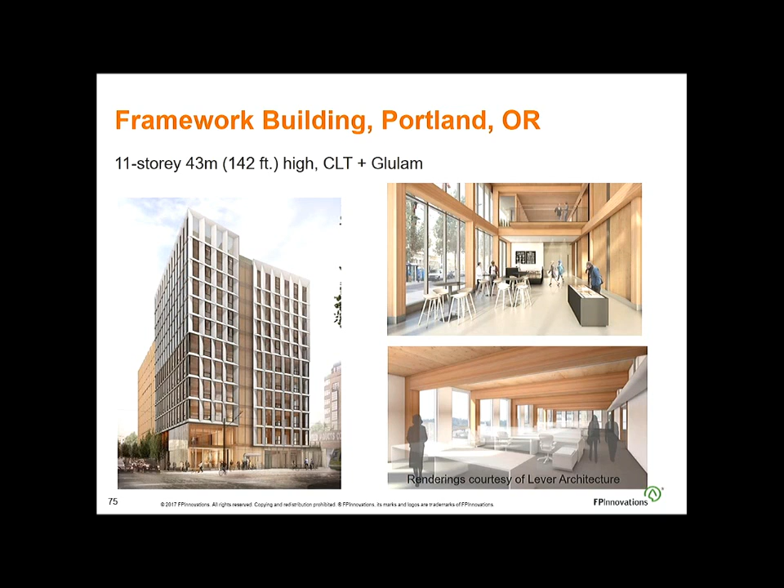You will hear a lot about this building because they had tons of innovative ideas in it. First of all, large spans - one of the problems for wood is having low stiffness, so large spans are difficult. They managed to provide very large spans, and they've come up with lots of innovative details in respect to the post-tensioning system.

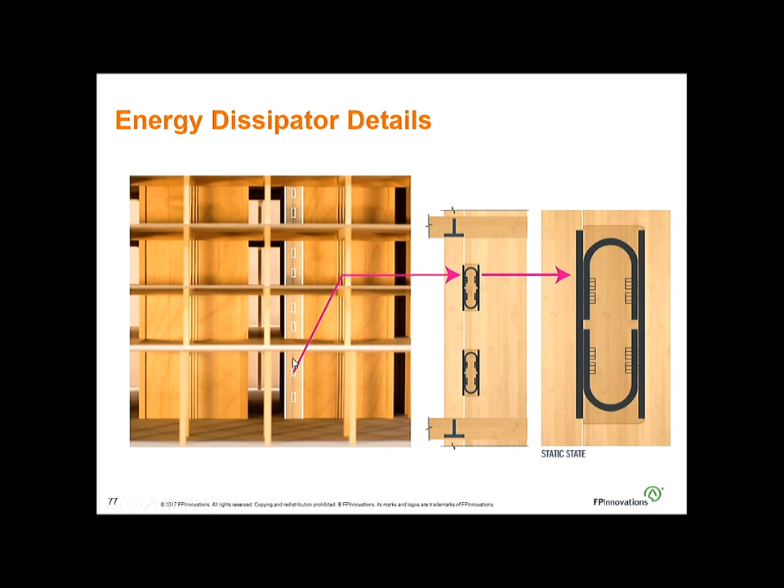So finally, just a few words about another product called dowel laminated timber. It's a very old product, nothing new - probably it's been around 100 years, but it's been forgotten most of that time. Now in Canada, Structurecraft, a company located just outside of Vancouver, opened a new plant a couple months ago, and they can produce dowel laminated timber panels which are 3.75 meters wide to 18.5 meters long.

Based on the demand, they can go even wider and longer. But this is for now what they can produce.

Basically, how this system works is you have your wood dowels. You dry them almost as dry as possible, then enter them into the wood. So the wood should be somewhere between 12% moisture content, while the dowel is around 5% or even 2% moisture content if possible. Then after the dowel is driven in, it sucks up the moisture from the lumber, reaching equilibrium moisture content, and swells. By swelling, it basically locks the panel together.

It's been a concept used for centuries, but not lately and not in applications that we see today. The company invested heavily into the new plant, and they really are seeing a lot of benefits, primarily using it for floors. For walls it will be difficult, but for floor applications it's a really good system.

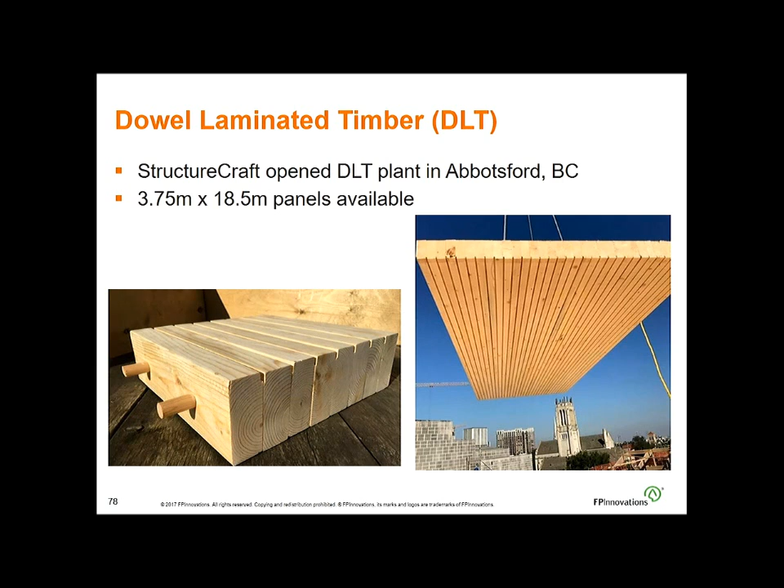Finally, the federal government of Canada just announced a few months ago that they will invest $40 million over the next 4 years for their new program called GC Wood, Green Construction Through Wood. This will support demonstration projects and activities related to use of wood, not only in tall buildings but generally in infrastructure. The first call for proposals went out, and we are in the process of reviewing now. 14 applications were received.

Worth of the projects is about 880 million. About 8 buildings of 10 to 12 stories, 4 buildings of 12 to 20 stories, and 1 building over 20 stories are in the competition. We will know in a few months which ones will be chosen. We expect probably 5 buildings that will be sponsored by this program.

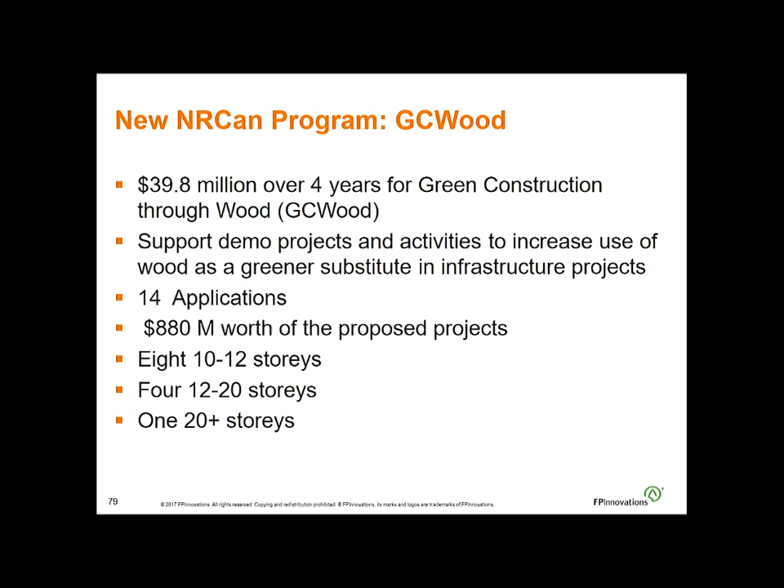And there will be a call next year not only for tall buildings, but as I said, general for infrastructure. So even bridges, industrial buildings, anything that can really showcase wood in different applications.

On the codes and standards activities, CLT has a product standard in North America called PRG 320. The first edition was in 2011, the latest one is this year, 2018. We just completed it. CLT is included in the 2016 CSA O86, which is the Canadian wood design standard, included as a product with its bending, shear, stiffness properties and so on, but also connections.

There's also a part that tells us how to design CLT as a platform-type lateral load resisting system, used for wind loads or earthquake loads. Mass timber will be allowed up to 12 stories in the 2020 National Building Code of Canada for gravity loads only, not for lateral loads.

So from the fire perspective, we are in an interesting situation right now in Canada, because it was always us, the structural engineers, who were pumping our chest, saying we can build, no problem, but fire was the obstacle. It was always fire that was the obstacle for wood.

So now in the code, fire is basically not an obstacle up to 12 stories, but we don't have a system to go up to 12 stories which is codified. We have alternative solutions, and I've shown you some, but we don't have a system for lateral loads that can go 12 stories. So for the first time in a long time, structural engineers were kind of behind.

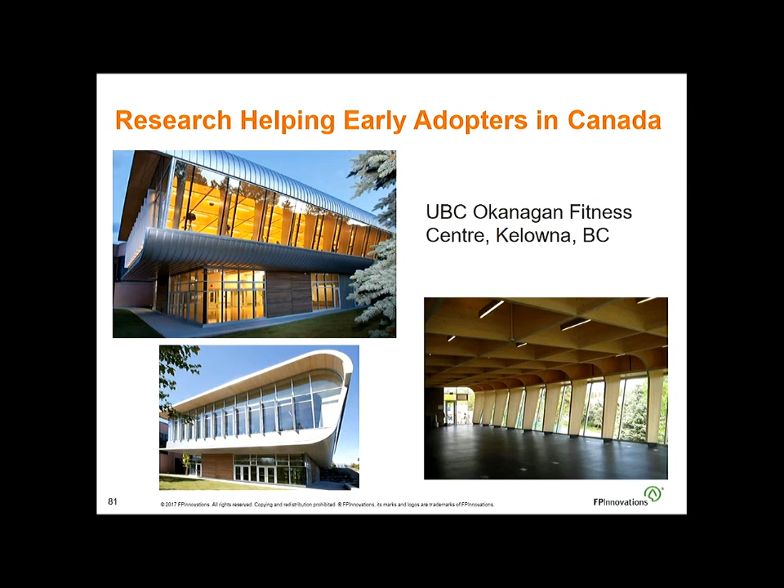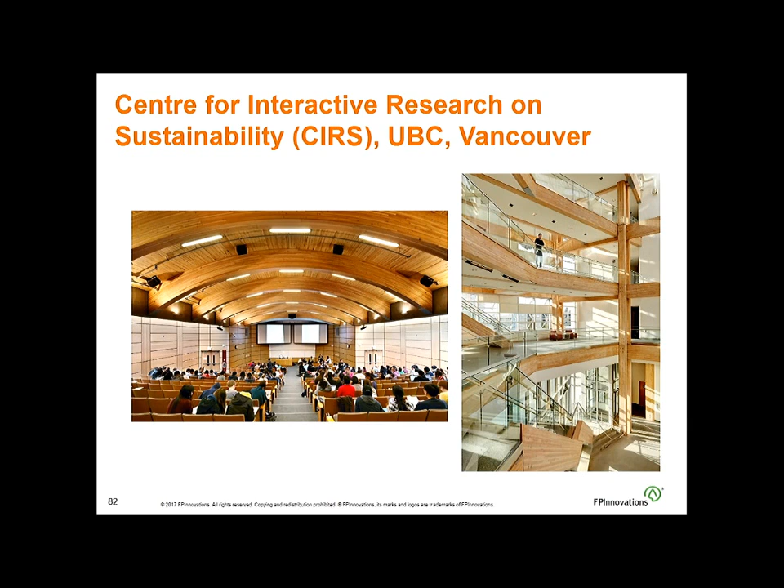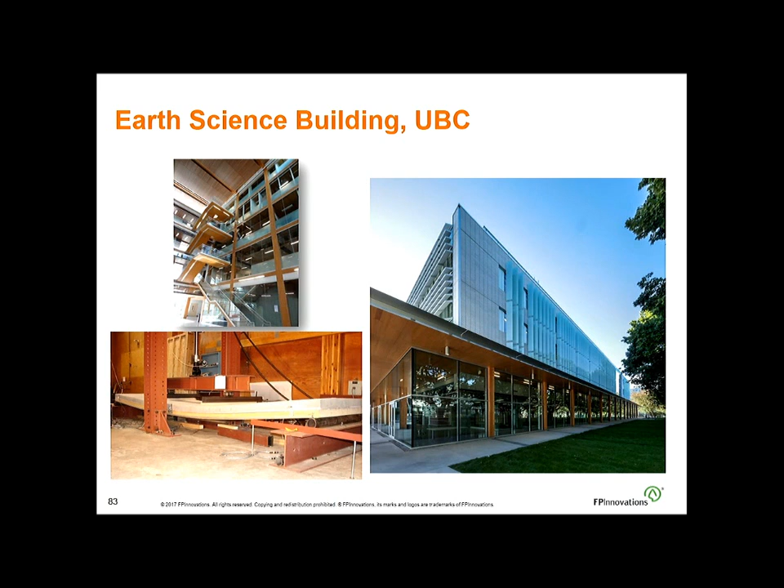This is the Earth Science building, again at UBC. A marvelous building, lots of innovative solutions, including the stairway—a floating stairway out of wood with zero movement, you can jump on it and it doesn't move. That was a huge marvel for the designer.

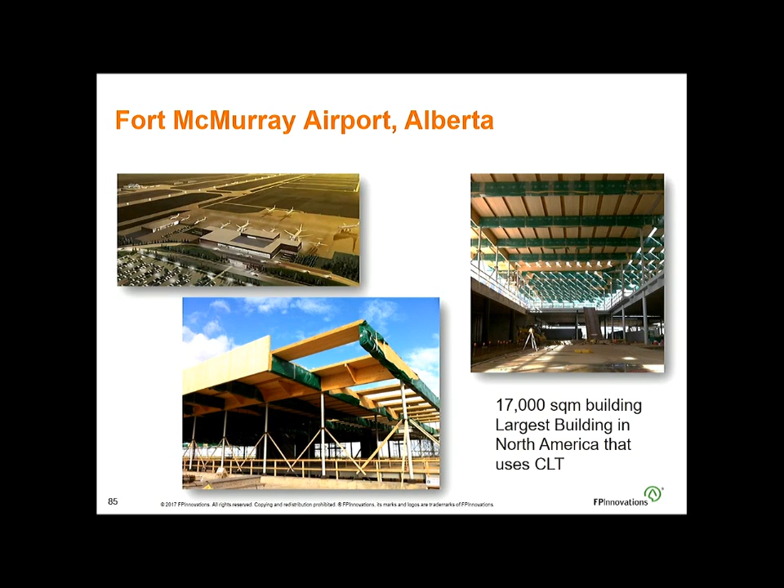Fort McMurray is a town in northern Alberta, Canada. This is the airport—it is still, by area, the largest building that uses CLT, a 17,000 square meter building, still the largest by area building that uses CLT panels. And the renaissance continues.